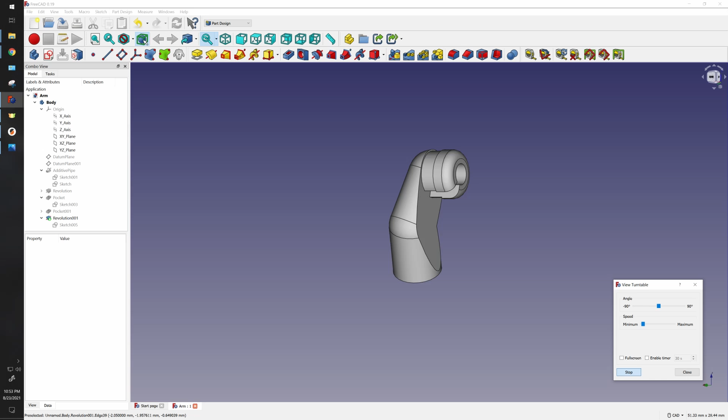Now, it looks a little funny here, but that's because the dimensions are a little off, as you'll learn later on in the video. But believe me, if you slap this into a Lego man, most people probably wouldn't even notice the difference.

Like always guys, create new. Let's go to our part design and create a new body. Usually we would start by making a sketch, but this time I want to drop a datum plane. And the easiest way to drop a datum plane is to pick an origin first. So if you look down here, it's hard to see, but there's the Y and here's the X when we're on the top. So I want to pick my XY plane, and when I click create datum plane, I get the option to create it there.

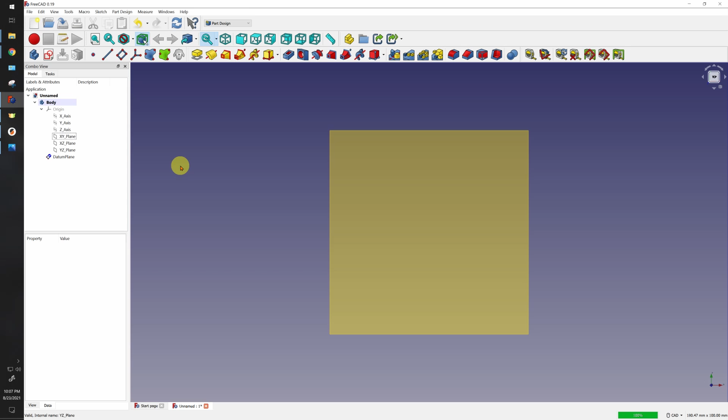The next thing I want to do is make a sketch on top of this datum plane. So I'm just going to select it here, going to create sketch.

Now I'm going to draw those bones that we measured in our last tutorial. So the way I'm going to do that is I'm just going to pick the line tool because we haven't used that in a while. Click here, remember to select it so it's on that X, our little perpendicular icon appears at the corner right there. Then we're going to go up. And the next one, I want to join to that. So again, I'm looking for that icon right here, and I'm going to go up like that.

So now we're going to add some dimensions to this. I'm actually sketching this upside down. I want this to be my shoulder, this is my elbow, and this is my wrist. And the reason is because later on, when we're adding our rounded bit at the top of our shoulder and our peg, I want those centered around the origin. Believe me, there is a madness to my method.

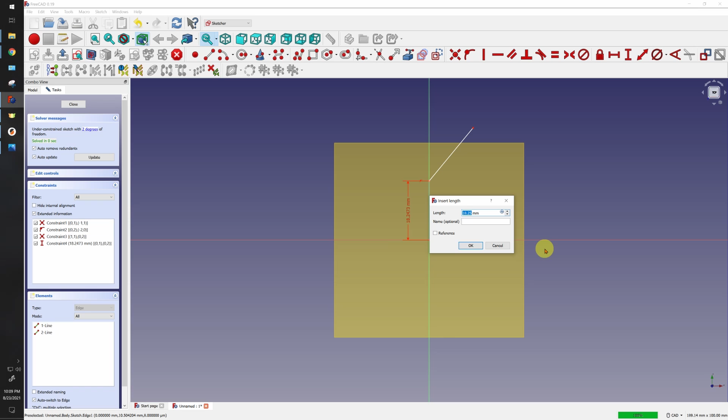So first of all, let's click horizontal, add the constraint, and for this I'm going to choose to go 4.6. Let's add our angle. If you remember our angle from here to here, 135 degrees. And finally, let's add this dimension. And because this isn't horizontal or vertical, we're going to have to use this guy right here. So fixed length, select that one, and it is 4.4 millimeters.

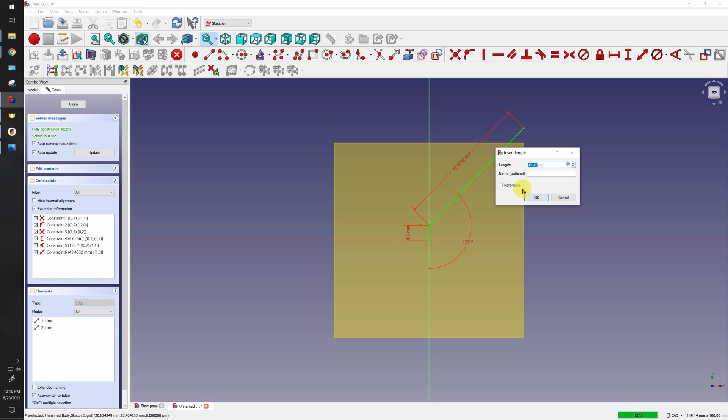Okay, now that I got this closed up, I can actually take the datum plane and hit spacebar to hide it. And what I want to do is I want to attach another datum plane to this point right here. So when I click here at this point, you're going to see this turn green. Just this, not the line.

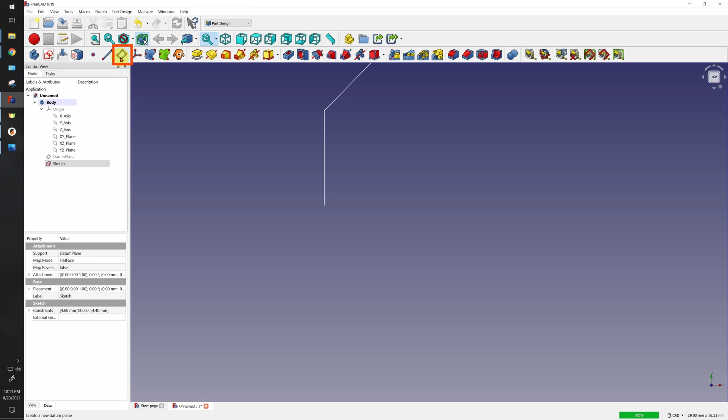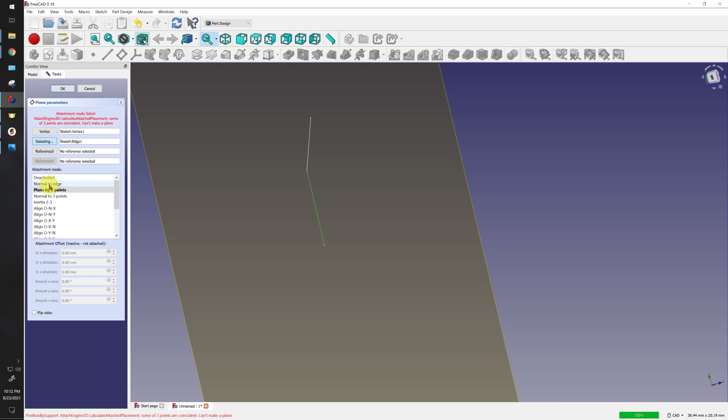So now I want to take my datum plane, and now it's attached to that point. But I don't want it to follow this line, I want it to be 90 degrees off. So what I want to do is select reference, till it says selecting, and I'm going to grab this guy right here. See, I got him here, and now I have this option that appears called normal to edge, and that's the one I want to pick. And that will make this an exact 90 degree offset. That is exactly what I want. I'm going to click OK.

What I want to do is put a sketch on this plane. So select here, make a sketch. And of course, as you can see, this sketch is attached to here. So now I'm going to choose my circle tool, attach it again to that center point, highlight it, and I'm going to give it a diameter.

Now, in the previous tutorial, we know that the arm actually gets thicker as it goes up in the shoulder. And you know what, we're not going to do that. We're going to pick one value for the whole thing, and this is what is very common in a cheater method. Let's just go for 4.2.

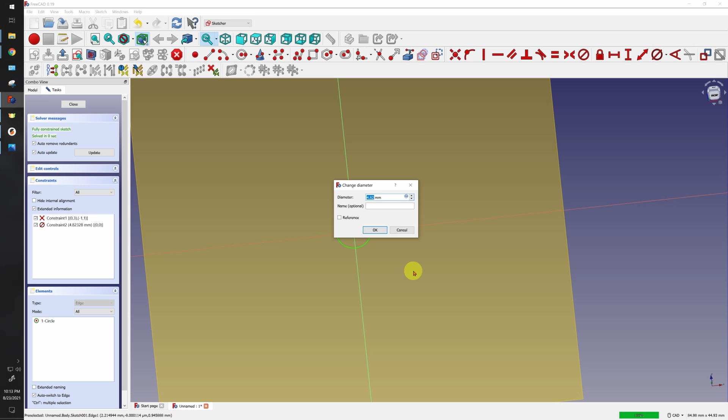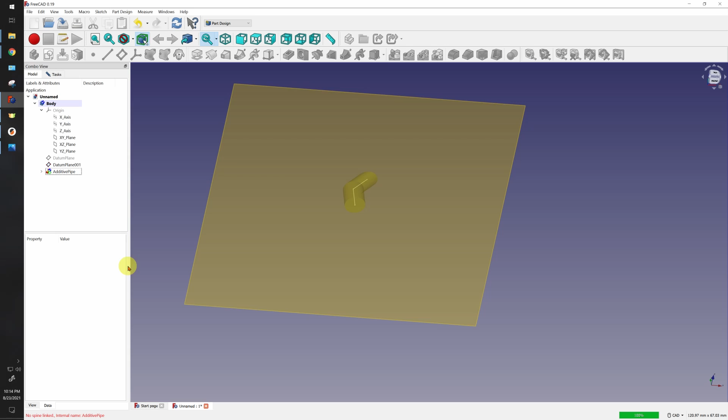So now that we have that, I can close it. Select your sketch one and select the sweep. When you select it, your object's already sketch one, and I want to select the second object. I'm going to try to get the sketch, but you see the plane is in a way. But I could just come back here and select the sketch right there, and there you go. Look at that. It kind of looks like an arm, but not quite.

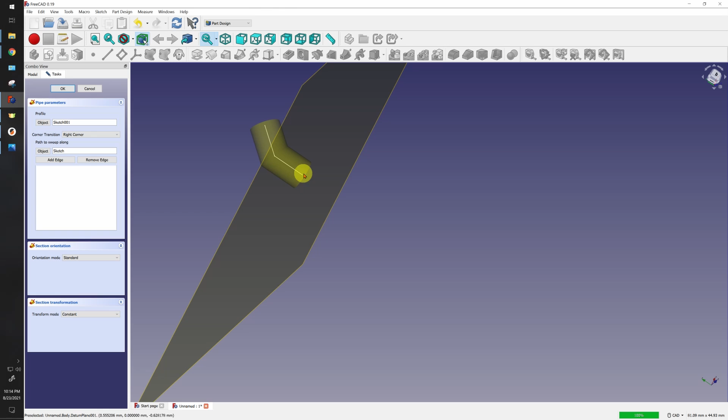But watch, there's a few tweaks to this command. For the transform, we can either have it follow, so if you notice this and this is perpendicular, you can go right corners, which will make them line up perfectly. And look at that, that looks even more Lego arm. Finally, we can go rounded corners, which actually puts a little rounded bit right in here. I'll zoom in and show you the difference between right angle and rounded corners. So that's the one I want. Gonna click OK.

We can come back here. We can hide that plane by hitting spacebar. So the next thing I want to do is create the shoulder here. To do that, I can simply click on this guy, make a sketch, and see this guy. This is our center of our sketch, our origin.

And look at that. This is what we want. This is beautiful. Click there to create a circle. Again, we want to snap to the origin, make it big, give it a diameter. And the diameter for this one was 4.2. And now it's perfect in line with this guy right here. Super happy about that. And now I'll just click this guy over here just to align me back up.

And now I want to put a line. I want to attach a line from here to here. This is the line I want to put down the middle. So next thing I want to do is I want to trim this edge, and trim the bottom right here.

So I'm going to select my old trusty trim tool. Click on this guy here, trim. Click on this guy here, trim. Click on this guy down here, trim. And if you remember, as soon as we trim, this doesn't actually join anything. So I kind of want to select both and use our coincident constraint. Now they're joined. Then I want to select that guy, use coincident constraint. And look, we still have 2 degrees of freedom.

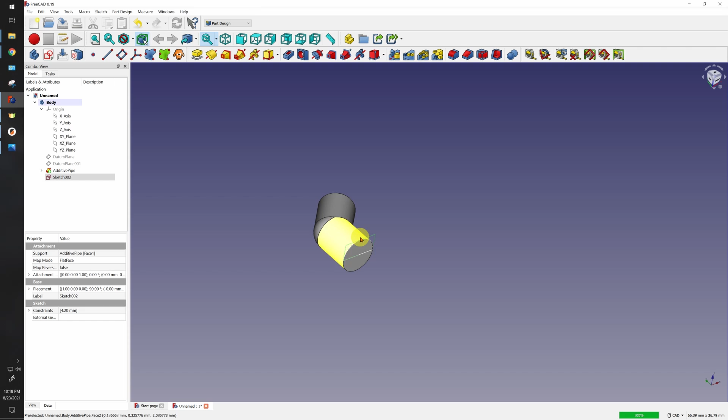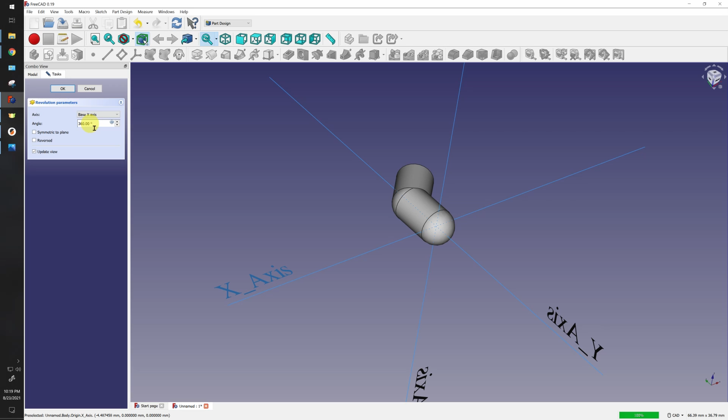What we're going to do to create the shoulder, of course, we're just going to do a revolve. So we'll select our little revolve tool here, click that, and it's going to say which axis. We can say the vertical sketch axis, or we can specify the x-axis. And you know what, I like to be specific. So let's go base axis here, and look at that. It wrapped that around. Now I only need it at 180 degrees, so my OCD is just going to type that in. Click OK, and look at that. That kind of looks like a shoulder now, doesn't it?

So the next thing we need to do is create a hole for our hand. So let's click here and let's just make a sketch. Now look at that, our origin is off. It's off here. Now we can calculate this in a couple different ways, but you know what?

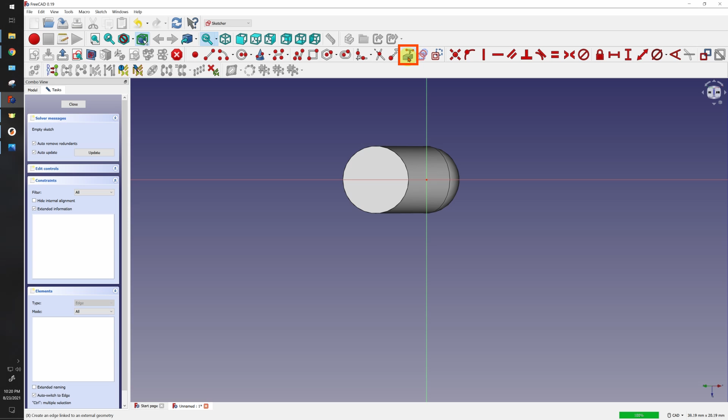I want to do this the effective lazy man way. So let's just link to external geometry by selecting this guy right here. Select this and look at that. Because it's a circle, it will automatically give us the center reference. And now I can draw a circle and use that. Make sure I got the right one right there. And look at that, now I'm right in the middle.

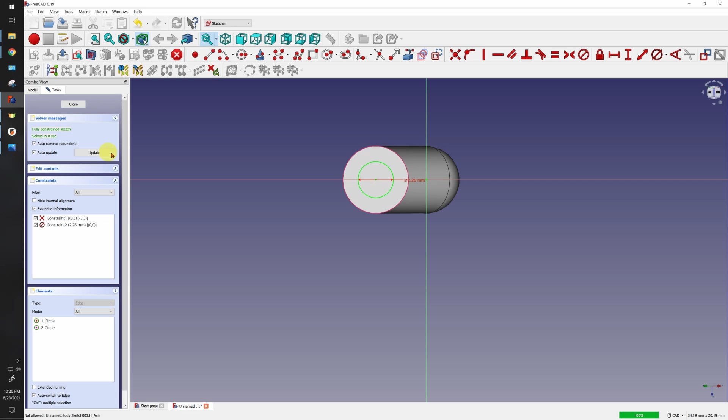So I'm going to create a diameter for the circle, and it's 2.26 millimeters. There you go. Fully constrained, love it. And of course, now what we want to do is make this into a pocket.

And let's just leave it at 5 millimeters for now. And now that almost looks like a Lego arm. Well, let's face it, it kind of looks jank, doesn't it? But here's where the magic happens.

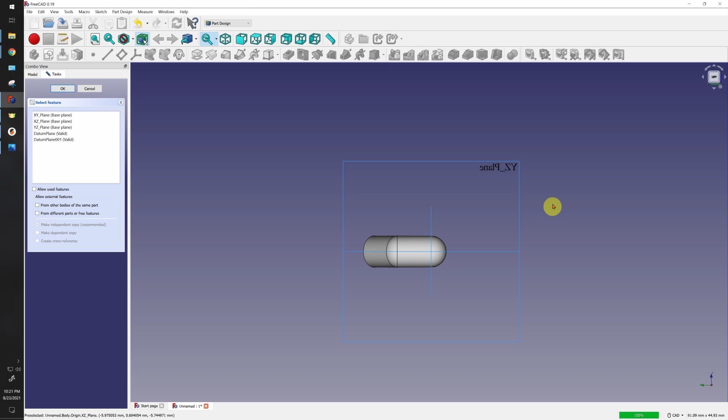Let's go to the left-hand side here, left view. And what I'm going to do is I want to make a sketch on that plane. So I'm going to create a sketch. And it asks us where we want it, and I want to go YZ right there.

Okie dokie, and now I'm going to draw a box. So I'm just going to draw this box. And you know what, let's constrain this just a little bit. So what I'm going to do is add a dimension there. And I don't really care, I think that's good enough.

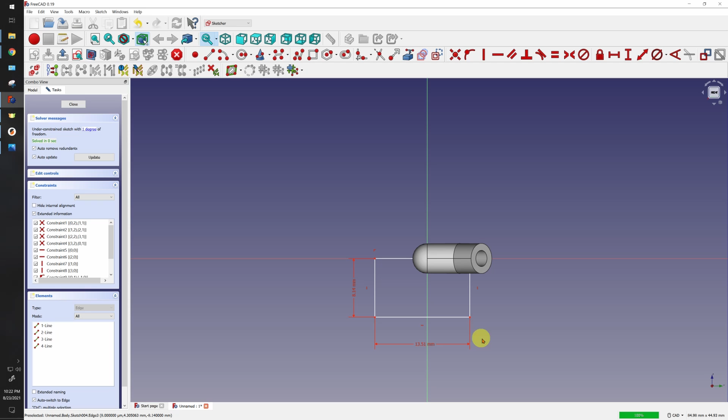Add a dimension there. Of course, where we have a degree of freedom left is that I can still move this whole thing around. So you know what, I'm just going to use my good old friend, create equal distance. I need access to both these points. They're hidden, well I got them over here.

So I'm just going to use those guys. Select the command again, click the edge, click the edge, and click the center. And there you go, now I'm fully constrained. I'm green, I'm happy, everything's good.

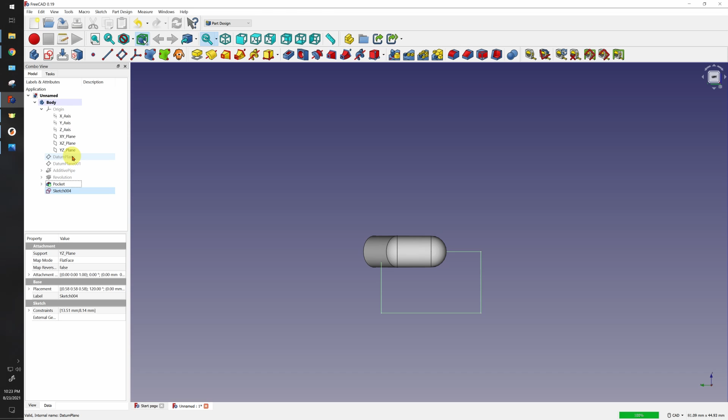That first datum plane that we drew, let's bring that back. And there it is right there. You can highlight it. Remember that angle that we have right there between the body here and this, and it was 16 degrees. That's what I'm trying to create.

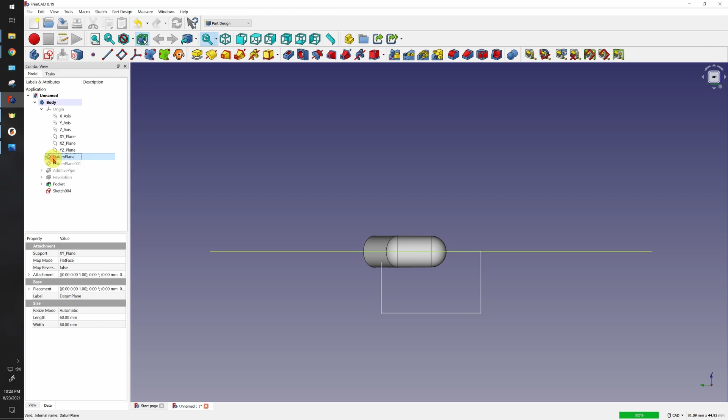So now I want to rotate this up by 16 degrees. And the way I can do that is by selecting the plane, edit the datum, and one of these will be the 16 degrees. Now, see how the z-axis is up and down? The x-axis or the y-axis here and the x-axis is there. That doesn't always align with a datum plane. Sometimes it does, sometimes it doesn't.

So I'm just going to go into the view that I want, and I'm going to go around x. And I'm going to type 16, and I'm going to hit enter. And look at that, I lucked out. It tilted it by 16 degrees, just like I want it to.

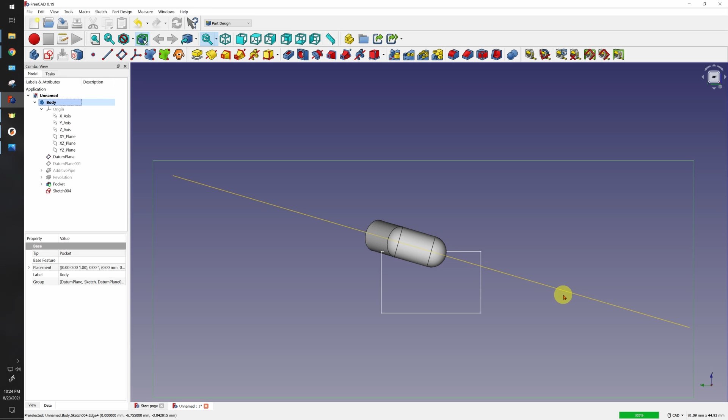Now you're going to say, well, what does that do for us? Well, check this out. If I select the body, and I go recompute object, because this sketch actually exists on this datum plane, it rotated the whole thing up. And now this is all still there, it's still all aligned.

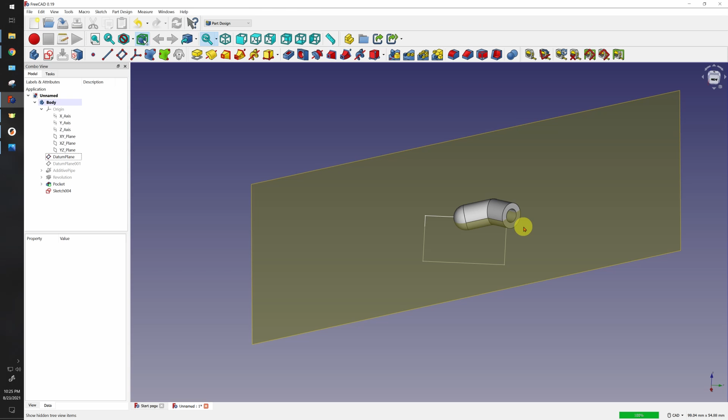Now, I don't know why, but if you try to create this hole after it's moved over, you're going to have a hell of a time getting that centered. Every time you change your degrees, like let's say we want to make it 25 or 30 and then go back to 10, it will break this constraint right here. That's why you want to do all that work before you tilt the plane.

So I'm going to go back into the sketch for a second, because you know what, I kind of want to add a little bit more. Let's make it 20. I want this to span the whole distance.

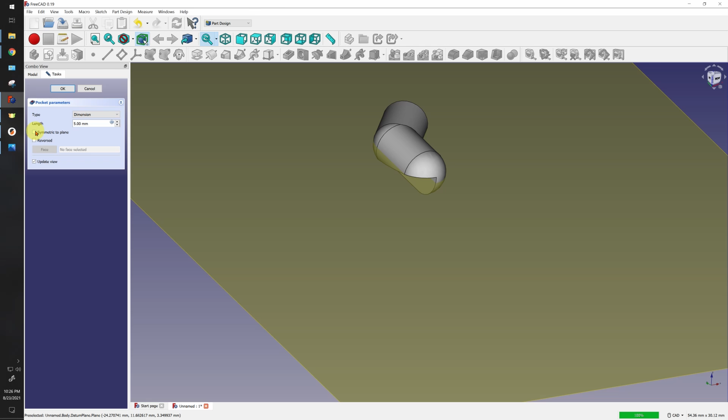And lastly, let's do a pocket. You knew this was coming. And of course, we're going to go symmetric, so it's going both ways. And you know what, but you can see it doesn't go far enough over. So let's add a few more.

18 sounds good. Click OK. And look at that. Let's hide this plane, click spacebar. You know what? That kind of looks like a Lego arm.

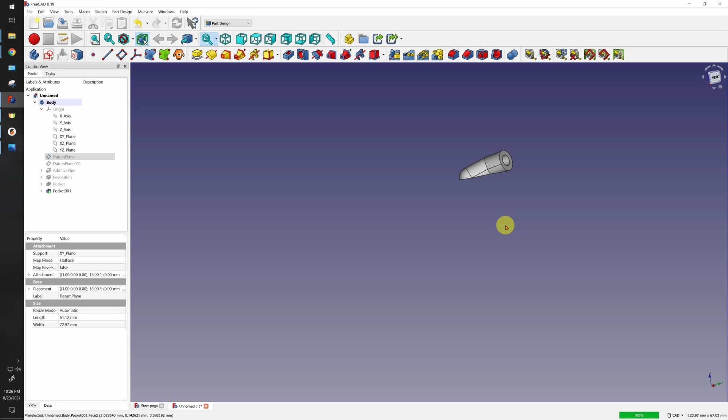It's not quite right, but it's close enough. The next thing I want to do, now that we have this, is create our little barb. I'm going to go to left view. Now that I'm in the left view, I'm just going to create a sketch on the YZ plane. Click OK.

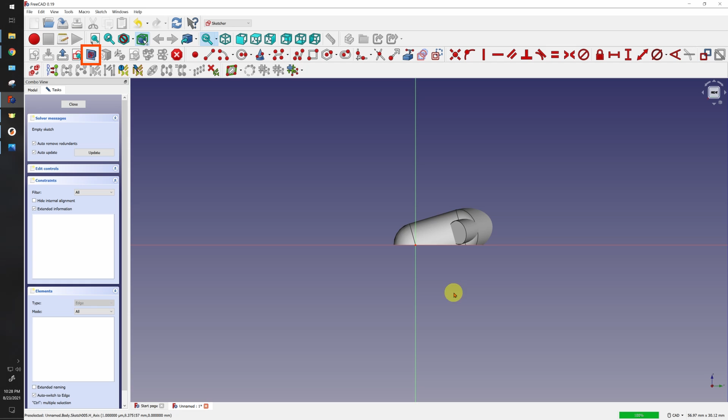Click OK. Let's slice this so we only see the front. When creating your barb, let's just do it with a line. Remember, we need a solid box. So let's go here, here, here, here, here, and of course we want to attach these two together.

And of course, you know what I want to do. I want to grab this guy here and give him a constraint. Let's make this guy vertical. Let's make this guy vertical. Let's make this guy horizontal. This guy's already horizontal. Now this guy needs to go to vertical.

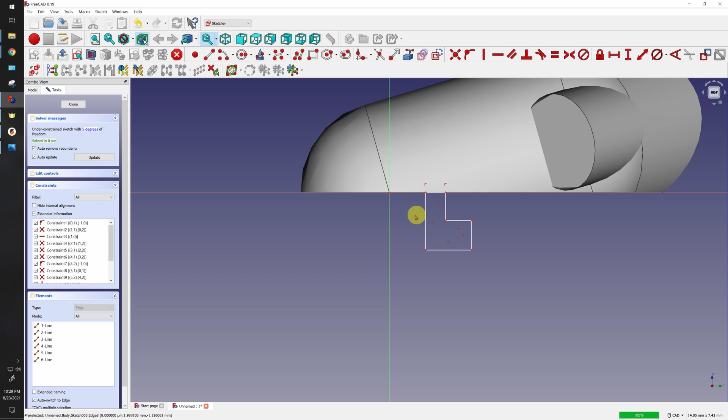And of course, we need to add some dimensions. This is what I want to do. So this line to the edge - there's a hole in here, right? So I'm going to add this guy, and I want to go to the middle, of course.

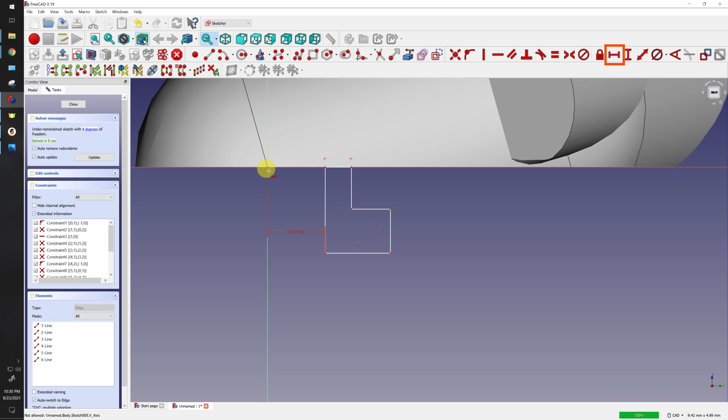I'm just going to use this one to the edge because I want to round off this corner later. So let's select this guy here, and select this guy here. According to my cheat sheet, it's 4.15, and of course we want to divide that by 2.

Last but not least, I want to give this length from here to here. This one is 3.94, and of course we're going to divide that by 2.

So now that I got this pattern here, what I want to do is put a chamfer right there. So of course we got our little 2D chamfer, and it's right over here. Let's select - or sorry, fillet, not chamfer. My mistake, I get those two confused a lot.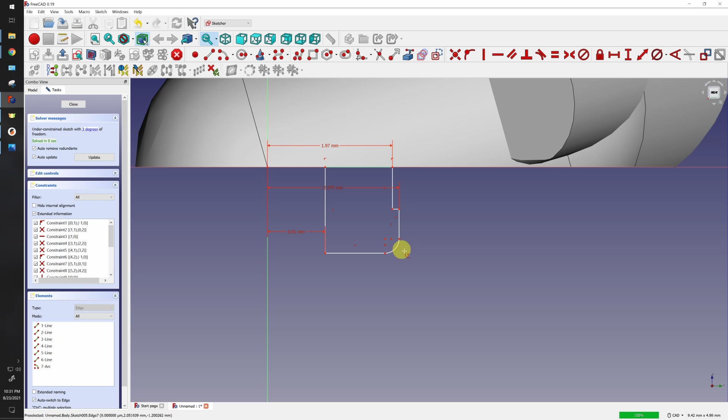Of course we want to see - that doesn't look good enough for me, I want it a little bit bigger. So let's select our radius, we'll click there and it says it's 0.22. Let's make it at least 0.5. There we go. And of course, so we need some heights here. So I'm going to select this guy here.

1.14. And we get an invalid constraint. Now what could this be? I have a feeling it's just that this isn't big enough. So sometimes if we take this guy here and make things really big, let's try that. And there you go, that worked.

Now the next one we want to do, this guy from here to here, and I have this height. So I'm going to select this guy here, and I'm going to select - you know what, maybe let's select this guy right there. And it's 1.6. Click OK to close that up.

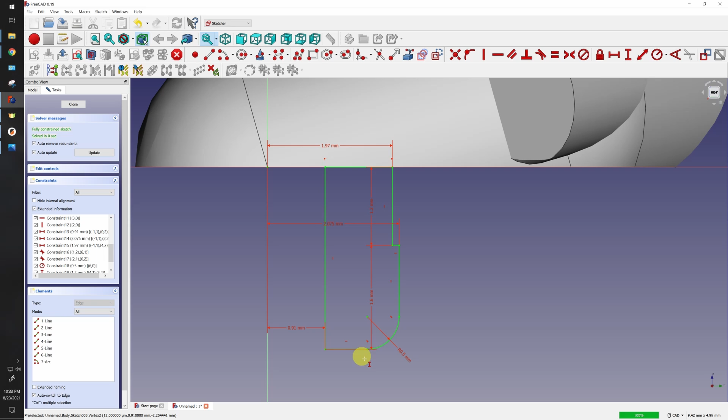And you know what we're going to do now? We're just going to rotate this around. And check that out. Now this might not look great, but remember, on a real Lego man, this guy right here is actually 5 millimeters. So he's a full millimeter larger.

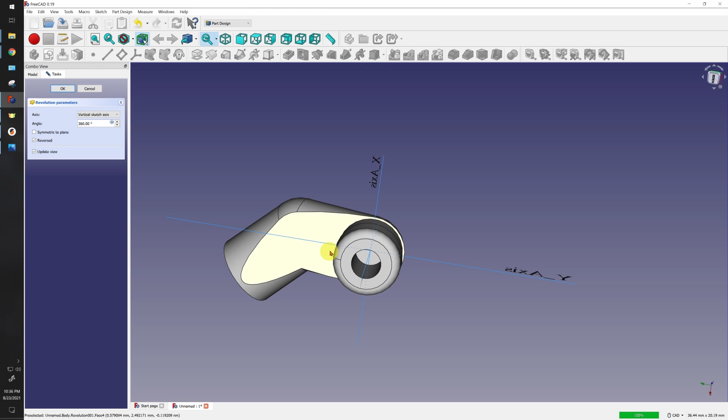There's actually a little bit of a cutout in one of these, so we can create a sketch here and then extrude it, cut and get rid of that. Or we could just be lazy - instead of making this 360 degrees, 330. And you know what, that's good enough. And there you go, now we have our cutout all the way down here.